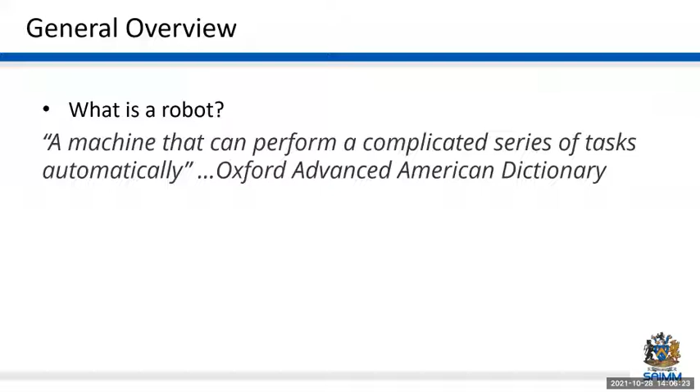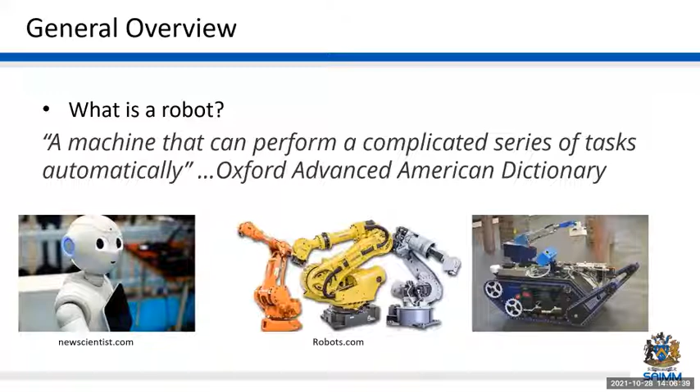So firstly, what is a robot, and what do we initially consider to be a robot? The formal definition is a robot is a machine that can perform a complicated series of tasks automatically. But when we think about a robot, what comes to mind? Initially, when I studied robotics, we were taught about industrial robots and we classified them in terms of their configuration. But nowadays there are so many different types of robots.

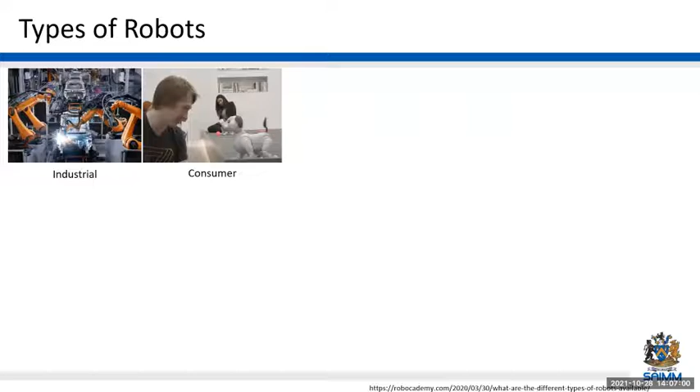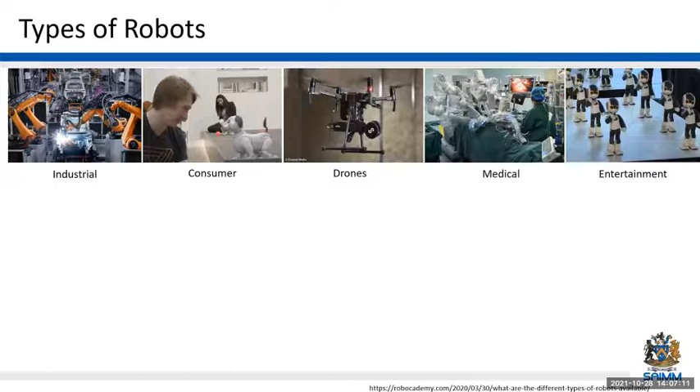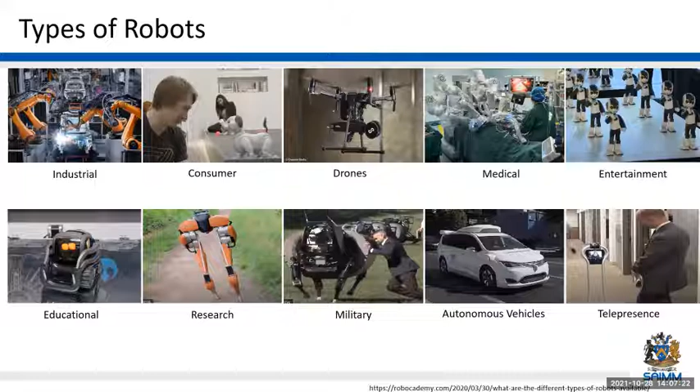The trend now is to classify types of robots in terms of their applications. So we'll start off with industrial robots, which include collaborative robots, automated guided vehicles, etc. There are consumer robots, and here you see an Aibo companion robot, drones, UAVs, medical robots, entertainment robots, robots for educational purposes, research robots, military robots, autonomous vehicles, and telepresence robots. In addition, there are classifications of humanoid robots and underwater robots.

What I found is that generally this type of classification depends on the different standards governing the design and operation of these platforms. In addition, there's also robotic process automation, a form of business process automation that allows anyone to define a set of instructions for a robot or bot to perform. For example, the chatbot you'd find on your Discovery app would be considered an RPA.

So when we consider mining robots, is it simply any robot used in mining applications? The answer would be yes. However, we need to also consider that there are different areas of mining applications. For example, drones can be used in mining, research robots can be used in mining, and industrial robots can be used in mining as well. But does that classify them as a mining robot?

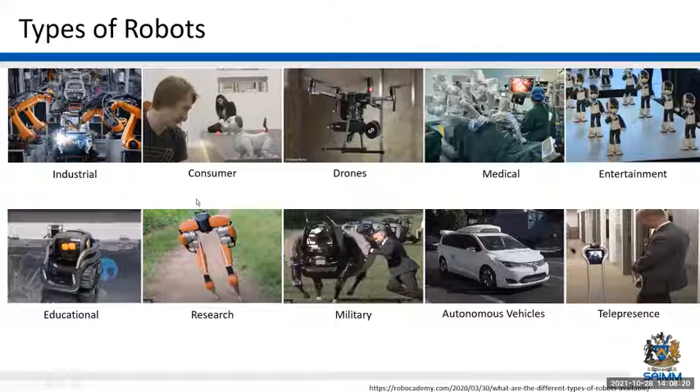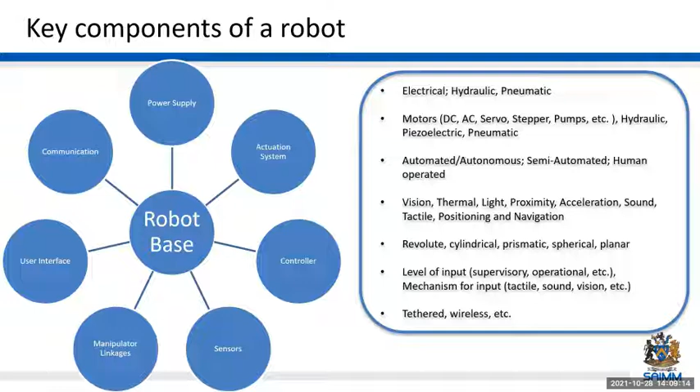For those different types of components, we get different options. For example, in the power supply, we can look at electrical, hydraulic, pneumatic, etc. There are different configurations of this which can be assembled to meet a specific need. And that's where I'm heading in the next slide: a robot is not just a platform that is designed in a silo. It's designed to work in an environment which has a specific need.

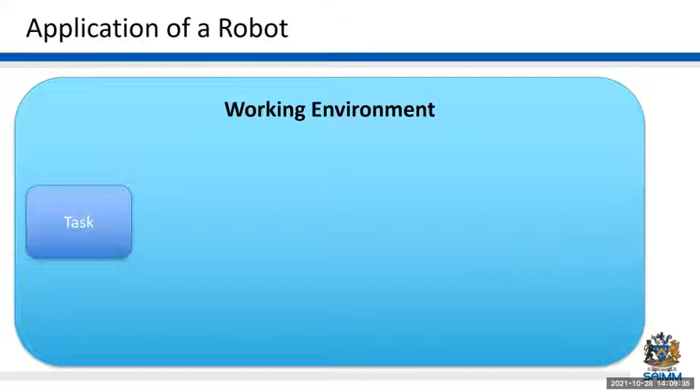To describe that, we'll start off with a working environment with a specific task that needs to be automated or robotized in some way. We can then follow a formal design process to come up with a solution to perform that task in an automated fashion, and then implement that robot. Ideally, what we're doing is conducting an ideation, creation, utilization process.

One thing to consider is that the environment it works in will place certain constraints on that platform. For example, the mode of operation: how would the robot interact with the environment? Would it be human operated, semi-autonomous, or have an autonomous function completely? When looking at different mining environments and their requirements, these sort of constraints need to be considered in the design of the platform, especially in remote circumstances where connectivity may be an issue, or tethered connections are not that practical.

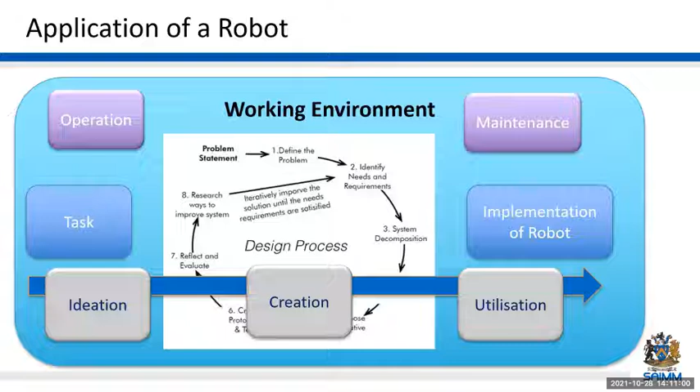There's also the maintenance consideration of that implementation we execute. An example would be in 2008 to 2011, there was a very big push in terms of mechanization at one of the platinum mines, and maintenance strategies not being suitably implemented was one of the causes for failures in that whole process.

Touching again in general on robot designs, what we find is that the trends in robot designs are moving now towards more modular designs, more configurable and reconfigurable designs, integrable or easy to interface, which talks to the last point here: fostering more collaboration across platforms.

For me, the most important one is where we can look at cross-application of robots across industries. The reason for this is that different industries evolve at different paces. For example, the automotive industry adopts digital technologies much more rapidly than the agricultural sector, or the mining sector for that matter.

So can we then look at cross-application of technologies developed in the automotive sector being applied to these industries? That's where I feel we can have a lot of value add in terms of quick wins.

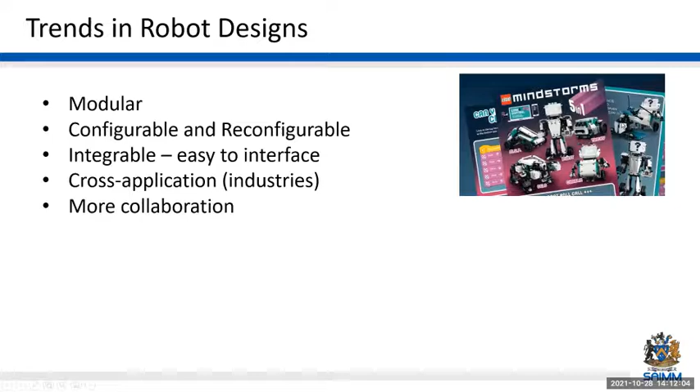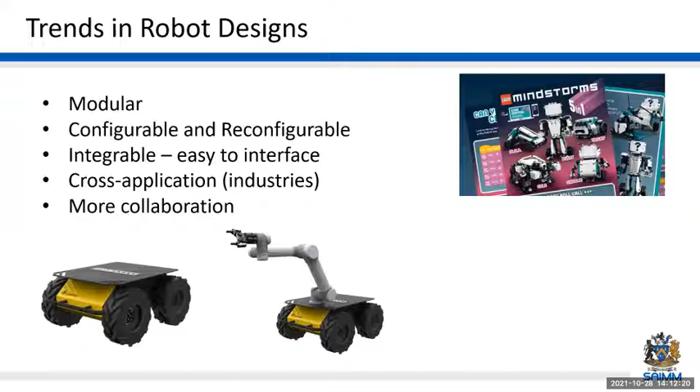An example of a configurable, modular design would be the Lego robots or Mindstorms. But a more commercial platform is the Husky platform from ClearPath Robotics, which comes as a standardized platform. You can put on it different types of, in this case I believe a Cobot or UR5, or configure it with different types of sensors to meet a specific need. What I wanted to show is that this modular, configurable, reconfigurable thinking has found its way into the commercial space of robotic design.

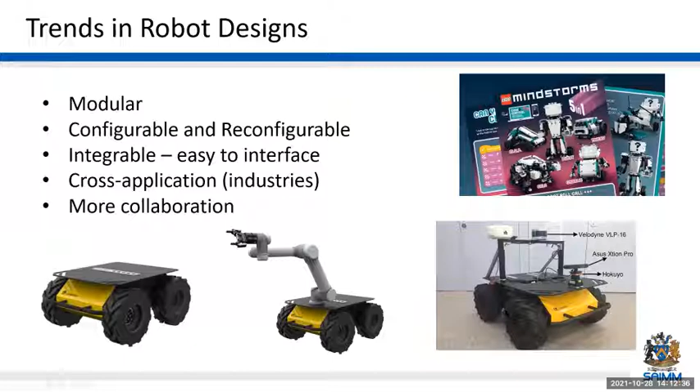In terms of mechanization and robotization, specifically with regards to mining, mechanization is defined as any machine, process, or activity that reduces the human effort required to break or move rock or material in a mine. Robotization is the introduction of robots to carry out a mining task.

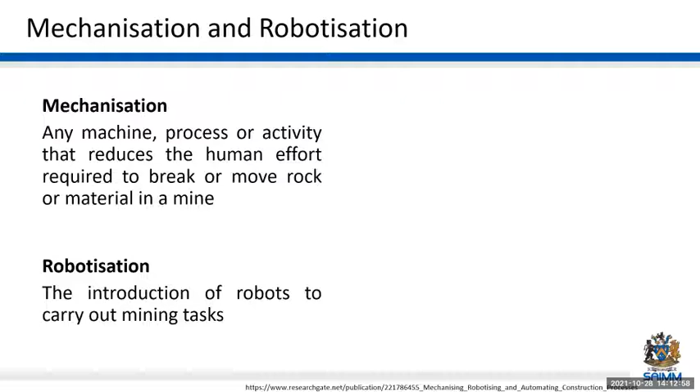I found this interesting diagram which shows a transition in terms of energy required from the user, and then the level of artificial intelligence or input control from the platform itself. Mechanization normally ends up somewhere around this point, and as we transition to the use of artificial intelligence, we get to more autonomous platforms, in general, in terms of the robot design itself.

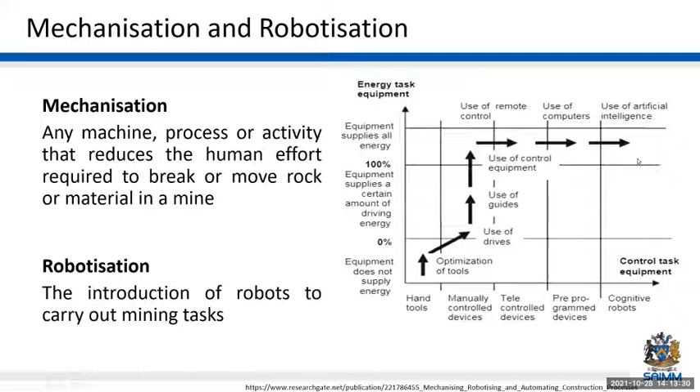In terms of application to mining, why would we even consider robots in mining? Well, typically mining environments are capital intensive. They involve a lot of routine job processes, and there are a lot of health and safety issues associated with job activities, such as exposure to potential physical harm with moving equipment, excessive heat, dust, poisonous smoke, harmful gases, etc.

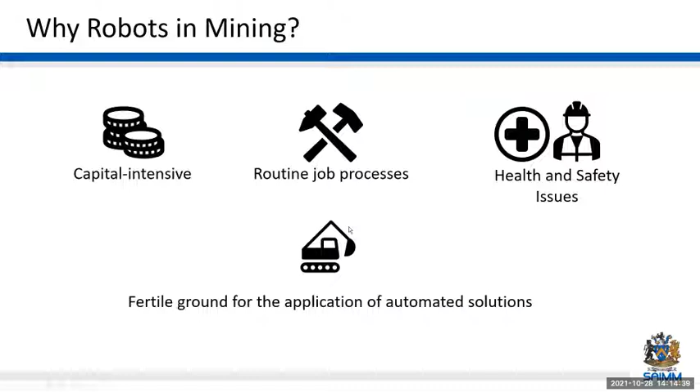This lends mining environments to being fertile ground for the application of automated solutions, where we can look at improving, first and foremost, safety and health, and also automating some routine processes. One example is the driving of a haul truck and implementation of monitoring systems to keep the driver aware of their state during the day, considering they have to drive the same path up and down over and over. So this is why we would consider it in general for the mining environment.

In terms of what's being done at Deloitte as a representation of the future of mining, they look at this across the value chain. In terms of automated solutions, they look at digitized geological data, which is not only the instrumentation or equipment to access geospatial information, but also the systems required to process that information.

So on one hand we're talking about the machine or equipment, which is that robot or some piece or device. Then we have the environment in which it functions, which needs to interface with that device in some way, and not only interface with it but actually make sense of the information coming through. I'll talk a bit more about haul trucks now.

Autonomous equipment, which includes the haul trucks, uses IoT sensors for real-time data capture. But again, it's a challenge as to where we implement those IoT sensors, and whether the data captured actually relates or transcends into some physical, tangible productivity gain for the plant. For me that's been a challenge in trying to track and optimize that process.

There are also wearables in terms of field maintenance and operator safety. This includes technologies like augmented reality and virtual reality for training, but also wearables for ensuring the right person is there at the right time, plus wearables for vitals and stats checking. There are drones for inspection, stock and safety monitoring, and connectivity of the workforce through mobile platforms to make sure the right person gets the right information at the right time so they can make the decision accordingly.

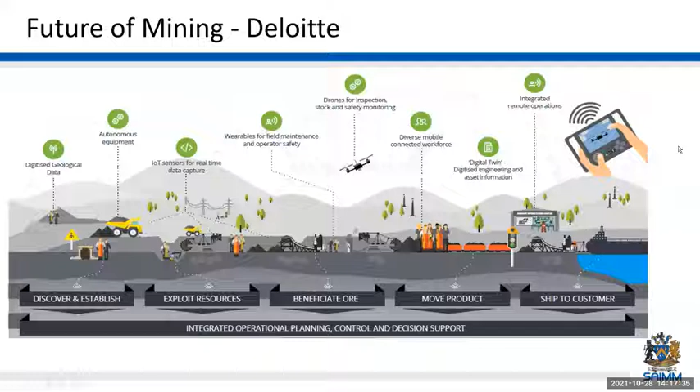All of that, though, hinges on the fact that there's a lot of data being generated. According to Deloitte, there needs to be some form of digital mine nerve center which looks at real-time information, historical data, housing this information in some form of platform, and then using that to translate into some physical, tangible output that can benefit the operation of the entire process itself.

So there's these robots that are going to come into an environment, or automated solutions that are going to come into an environment, but there's also the overlying or overarching system that needs to manage these platforms, not only from an operational perspective, but also from a strategic perspective, to understand what is the best solution for this specific point requirement in the value chain.

Just a quick snapshot in terms of the global robotics market in mining. This was a publication by Technavio, which released a report for 2018 to 2022, and they're quite positive, claiming that the market for robots in mining will be accelerating over this period with a compound annual growth rate of over 27%.

One of the key drivers for this market will be the increase in technology investment by mining companies, in efforts to improve productivity and, more importantly, improve safety around mining environments. One thing worthy of note is that the market is fairly fragmented, with quite a few players occupying the market share, and this lends to more sporadic point solutions that go to the cheapest vendor normally, as opposed to looking at things from a holistic perspective.

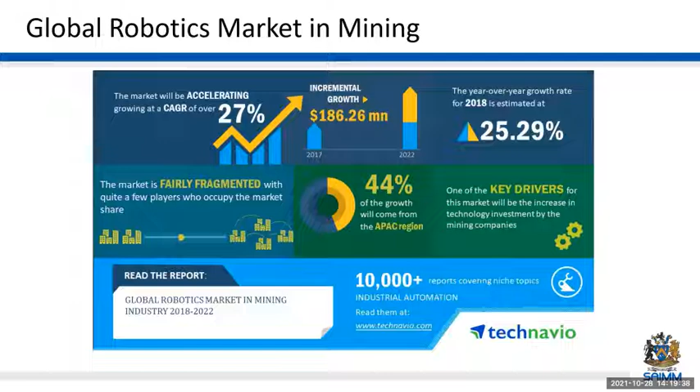In terms of the mining sector, this was some stats released by the Minerals Council for 2020: the mining sector employed about 450,000 people, contributed about 27 billion rand in taxes, and about 361 billion rand towards the GDP. This is quite important when considering now, as we introduce more robotic and automated solutions to this environment, what impact it has in terms of the employment of people, the number of people employed, the taxes coming into the system, and the overall contribution to the GDP.

Moving on, we'll start with some commercial platforms. It'll be good to remember the components of the robot and view these platforms in that context. So I'm going to start now with materials handling and autonomous haulage in particular.

I'll start with the Cat MineStar command system, which has been documented to reduce operational costs of mines by a claimed 20% and improve productivity by up to 30%. This is obviously because it can run continually, it's reliable, it has sensors, etc., but it also has the ability to alert maintenance workers on machine problems.

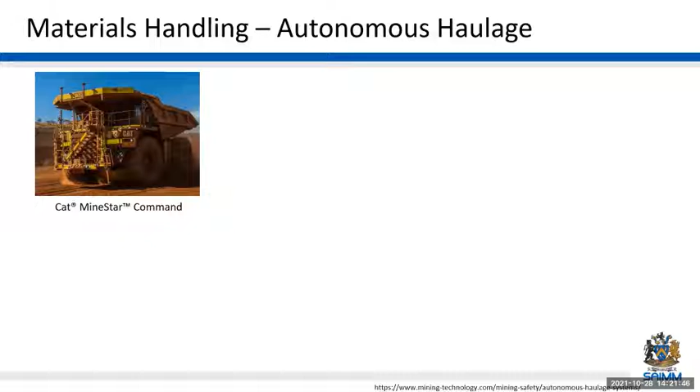This is because of the sensory components on this platform, implemented in a way to understand firstly what are the key areas or key inputs to measure in relation to the KPIs you want to govern, and then also to facilitate the generation, transmission, and processing of that data to translate it into improved maintenance. There's about 350 trucks like this worldwide, and they're currently embarking on a move to electric drive vehicles.

Komatsu also has their offerings, the electric drive haul trucks, combined now with their procurement of Modular Mining. They've obtained the Dispatch fleet management system, which allows for interaction between the loaders, graders, and dozers. Instead of these different components functioning as individual entities, they can talk to each other, forming a systematic approach that facilitates an optimized integration of these different components into one offering in terms of automated haulage.

There's about 150 of these trucks used globally, and the system was the first in the industry to qualify to run on private LTE mobile broadband technology in commercial operations. This was in 2019.

Hitachi also came up with their automated haul solutions. One interesting thing was that the company incorporated a permission control technique from the railway industry into its automated haul systems. For me, this was quite interesting because it shows in the commercial space how technology transfer can occur across different industries, in this case from locomotive to the mining industry.

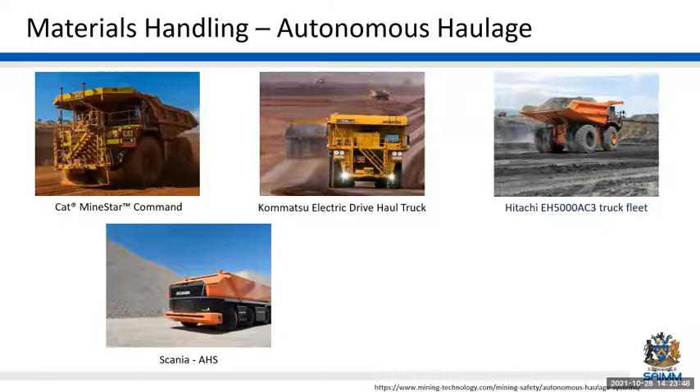Lastly, Scania also came up with a solution that runs on an electric battery drive system. One interesting thing in terms of moving to electrification of these vehicles is it lends them more suitable to underground applications in terms of heat generation, etc.

But there are ongoing challenges with these systems, and some of them recently have been noted as cybersecurity threats in the form of GPS attacks, which force these platforms to deviate from their true positions, leading to potential collisions. There are also camera attacks, which intentionally block out some of the cameras, potentially causing collisions. There's also reliability of connectivity in some areas that poses an issue when looking at implementation of these systems.

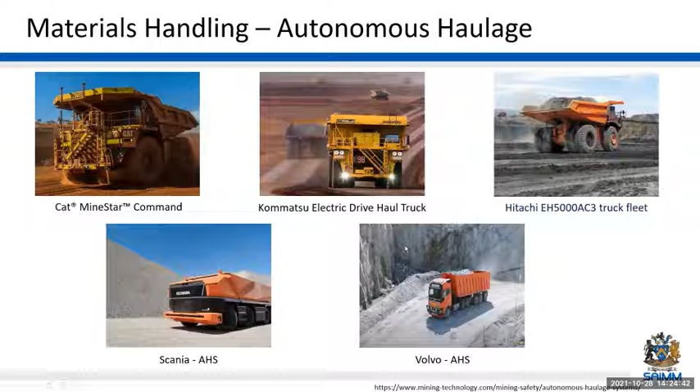In terms of our layout, or the representation of what a robot is, it's improvements in the power supplies, the communication, the user interface, the controllers, and the sensors that are driving the development in this field.

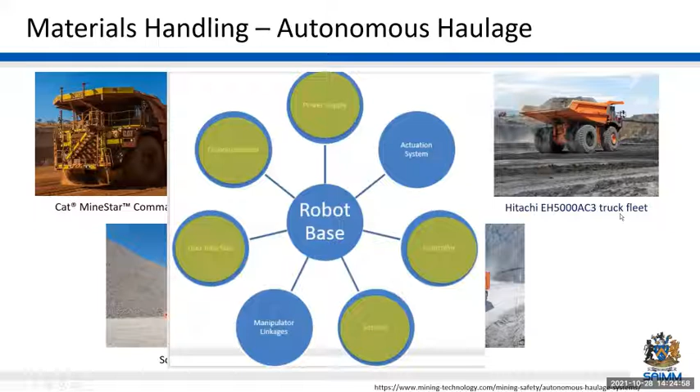Then if we look at autonomous drills, there's Vale in Brazil, Rio Tinto, and then our own Kumba Iron Ore, which embarked on implementing autonomous drills in their environments.

Vale, I believe, if they haven't finished it already, is currently embarking on completing the implementation of 21 of these units, using the Flanders ARDVARC automation technology, coupled with or implemented onto Epiroc and Caterpillar platforms.

One thing I want to point out here is that these platforms weren't necessarily built for autonomous application. They were retrofitted for that type of application. Why that is significant is it shows that legacy equipment can be taken advantage of, or we can utilize legacy equipment with certain innovations in control technologies, etc., to facilitate this type of application.

What that means then is that the CapEx, etc., gets impacted by this type of approach, and it relies heavily on the ability or the willingness for vendors to facilitate this type of collaborative approach, which I spoke about in terms of the trends in robotics.

In terms of the Kumba Iron platforms, it's developed by a supplier called Rosond, I believe based in Midrand, and they are aiming to implement 28 of these rigs. Some reports say up to 30 at the site, but the goal is to do that by the end of this year. These platforms are prone to similar challenges as the autonomous haul systems in terms of GPS hacks and cybersecurity issues, etc.

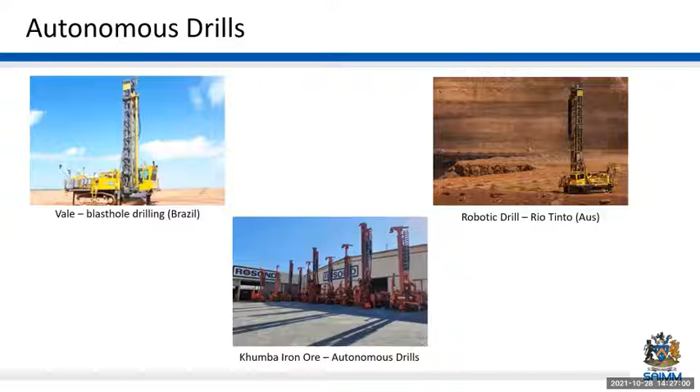Again, the systems or components driving progression in this field for me are the communication and the user interfaces. The reason I mention user interfaces is that when we have predominantly a low-skilled labor force, the equipment we expose them to and the interface to that equipment needs to match that level of skill. So nobody needs to necessarily be a programmer, but they may be able to use some form of graphical interface to facilitate that interaction.

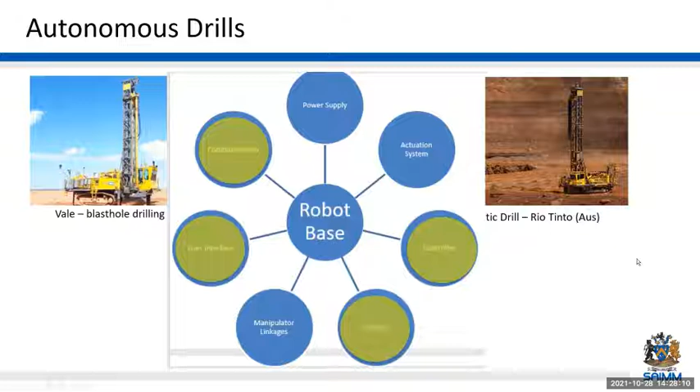Then there's advances in the controllers in terms of the execution and the accuracy or precision of the motions, etc., and then the sensors for providing feedback in terms of GPS coordinates. I remember at one point they were talking about GPS accuracies within 240 millimeters, and the drill bit itself was about 250 millimeters, so they were well within, quite accurate, for drilling these holes, etc.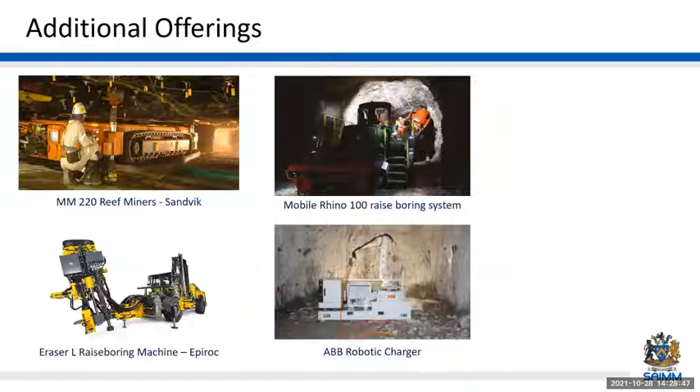There's also inclusion of self-driving ore carriers. And in addition to the platforms themselves, there are tools on the platform, such as smart cutters, which in some cases can associate changes in current draw to the hardness and potentially the characteristics of the materials being removed, and can provide information on that.

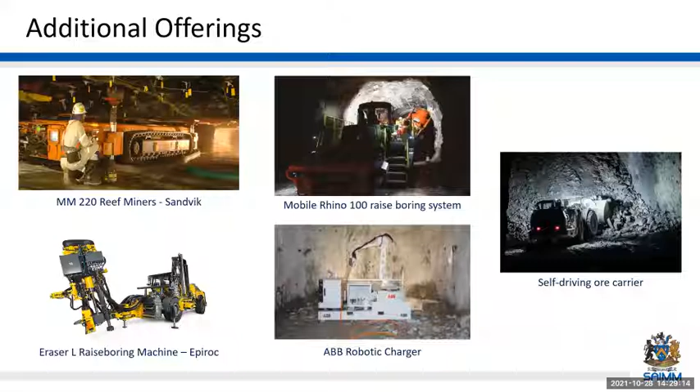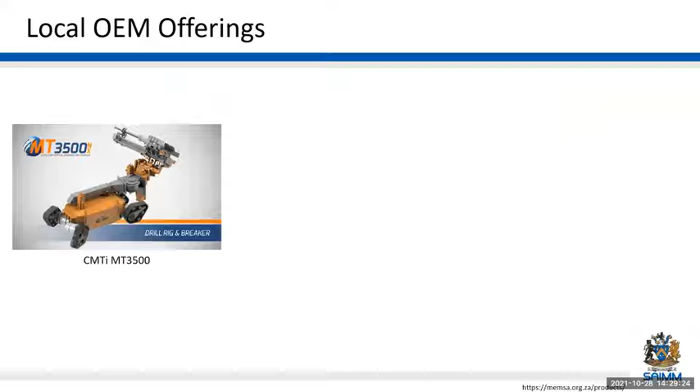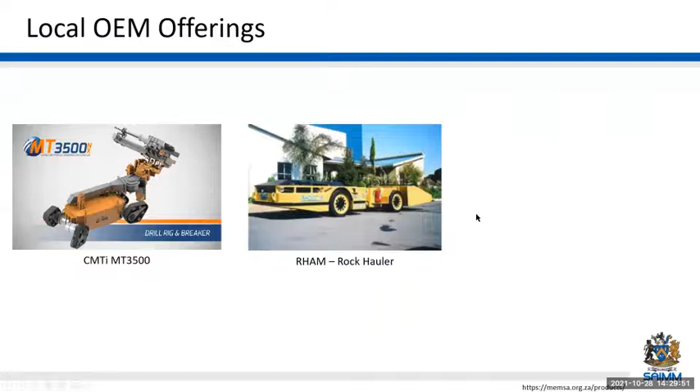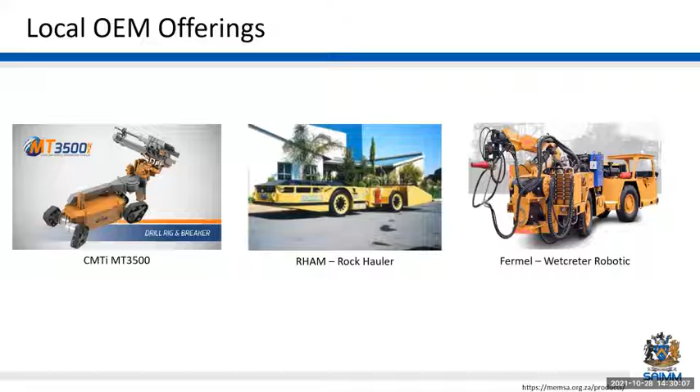In terms of some local OEM offerings, we have the CMTI MT3500 platform, which is remotely operated. One issue previously was staff leaving the remote controls in an almost waterlogged environment, which resulted in damage. We also have the RHAM rock hauler, and the Wetcreter robotic solution from Fermel, which has some robotic abilities in terms of spraying the Wetcrete, etc. Kindly note I haven't been able to survey all the offerings of local OEMs, and I may have excluded some that may be relevant, so I apologize for that.

In Germany, we see a lot of initiatives happening in the research space, but it's transitioning more to the commercial side now. One example is the Julius Robot, positioned to be an assistive robot.

This involves a robotic arm tipped with a 3-fingered hand. It's capable of holding a scanning device very still and is able to analyze the quality of ore samples. The idea is to have a symbiotic human-robot team where the robotic assistant contributes its physical strength and precision, while the human is in charge of decision-making ultimately.

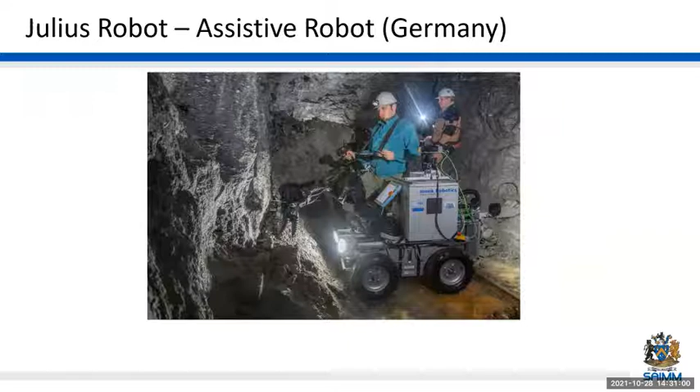Again, the key components in terms of developments that drove this are the user interface, sensors, controllers, actuation systems, power supplies, communication, etc.

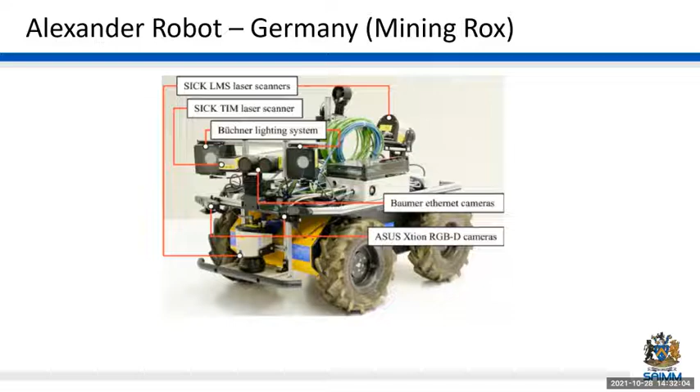The first section was a working section with rails, the second was the ore drift. The robot was able to generate a navigation map. It measured temperature, air humidity, and air speed, and tied these measurements to the generated map that was produced. Here we see how the robot base merged with the inclusion of some sensors can provide a quick win in this type of application.

Another example is the UNEXMIN, an EU-driven initiative developed to reassess old mines, most of which are flooded. This is an autonomous underwater robot which can function without remote control. The goal is to get it to function up to 500 meters without remote control or any human intervention.

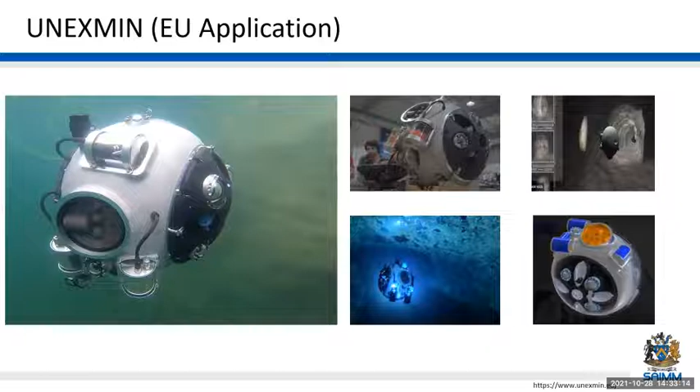It can potentially identify interesting minerals, and the purpose is to assist geologists in determining if further exploration is feasible. It consists of a flow meter, sonar, laser beam, and accelerometer sensors. The project is still ongoing in terms of completing tests for the proof of concept, and because it's a new platform, innovations needed to happen across all these different components.

This is a rail inspection robot called SID, or Survey Inspection Device, developed at the CSIR for inspection of rails. I believe in 2018 there was a case in Phalaborwa where a locomotive collided with an elephant in the game park, and a device like this that runs autonomously ahead of the locomotive could have helped prevent that type of situation.

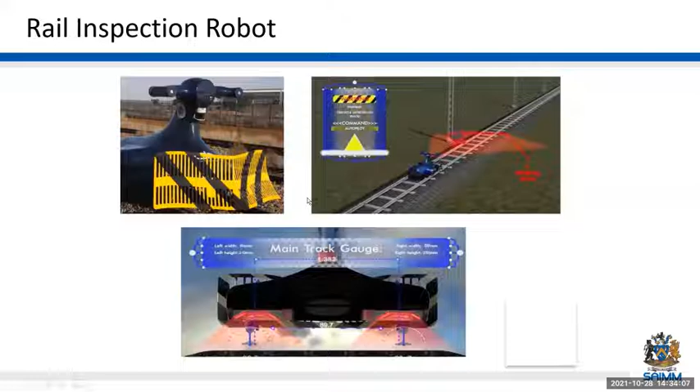It also helps in preventing derailments. This was taken to a proof of concept stage where it could measure track gauges, etc., and it was tested on some rails for Transnet. But application to the mining industry is potentially there.

Lastly, in terms of drones, they have many applications both on surface and underground. I'll talk a bit about the surface ones, where we look at stockpile management for better inventory and financial data, better forecasting of mineral stock for sale, and mine or quarry monitoring and operation planning for haul roads and water and sediment flow.

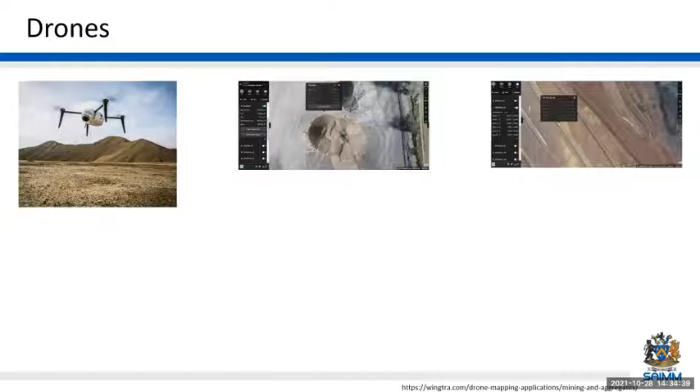There are assessments before and after drilling or blasting, hazard identification and mitigation, and lastly mineral exploration. Again, here it's the changes in these different mechanisms or components that enable this type of development to be commercially available and implemented in the mining space.

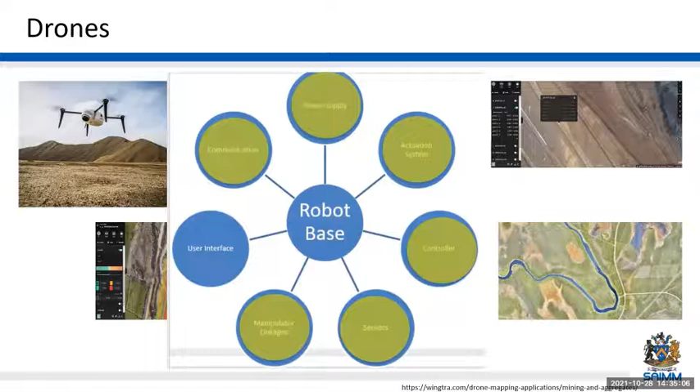In terms of some emerging developments, this is some results from an analysis done by Boston Consulting Group, who have a branch in South Africa.

They looked at what's already in use in terms of big data, real-time data, logistics, and blockchain, and they looked at digital twins, which are already being implemented at different mines or different operations. They looked at real-time data being implemented for predictive maintenance, the logistics side of things, the solutions existing there, and then the application of blockchain to validate the transactions that occur within the value chain, across the value chain.

Then they also looked at some of the close to commercial use in terms of interconnected sensors, and that's looking at the drone side of things, but looking at performing in situ scanning.

There's advanced analytics, and some of the challenges come in where, for example, you get autonomous trucks that generate 1 terabyte of data per day. And it's nice to have a system that can generate this data, but sometimes it becomes so much and we don't know what to do with it. And there are so many systems that generate this type of data.

In one of the mines we visited, there were 293 independent systems feeding information. And it became very difficult to track the application or facilitate the incorporation or transition of that raw data into some physical, tangible improvement in the system.

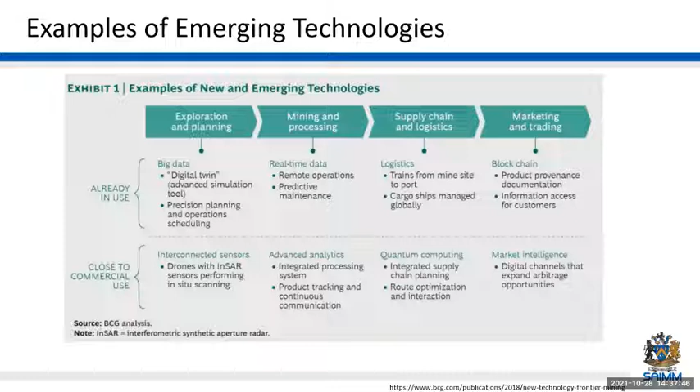An example would be for the haul trucks, and a good application would be for looking at dispensing suppressant for dust suppression and optimizing that process. If you can equip those trucks with flow meters and optimally dispense the suppressant, you could also have an idea of what the cost is going to be at the end of the month. Typically what happens is that the suppressant gets dispensed, and then the contractors bill the company at the end of the month saying this is what you owe us, without any sort of feedback or method to validate that spend. Then we also look at market intelligence in terms of digital channels that expand arbitrage opportunities.

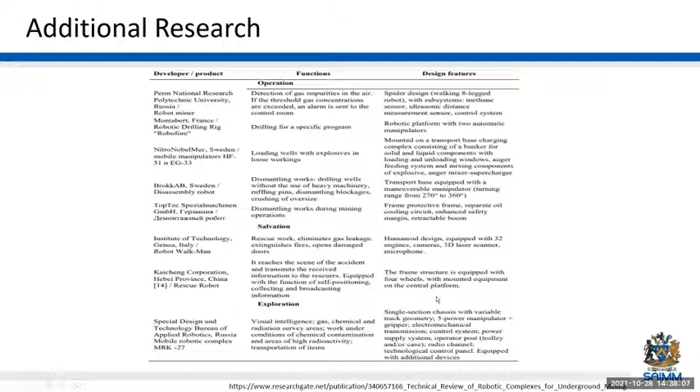But there's also research being done across the globe when it comes to different types of robots and applications of robots. I'm not going to go too much into this because of time constraints, but I believe this presentation will be made available and you guys can read through this. This was just to show that there is ongoing research.

Moving on then to further work by Boston Consulting Group, we have the challenges that they've been looking at identifying, where companies say that they want greater collaboration between IT and users. The data is insufficient or inaccurate. The solutions that come in are standalone or work in silos. And there's a lack of a well-established digital upskilling program, so when we incorporate these solutions, there's an insufficient skills base to address that.

Sorry, I'm just going to... Sorry guys, I must apologize for the background noise. Of all days, people decide to move offices today. Apologies for that. Sorry, where was I? I was talking about the insufficient approach. Again, sorry about that, I have to tell people to keep quiet there.

Okay, so I was talking about the lack of a well-established digital upskilling program, where we want to incorporate or bring in these automated solutions, bring in these robots, but we don't necessarily have the skill sets to adapt to that or to operate and implement those solutions. And that poses a challenge as well.

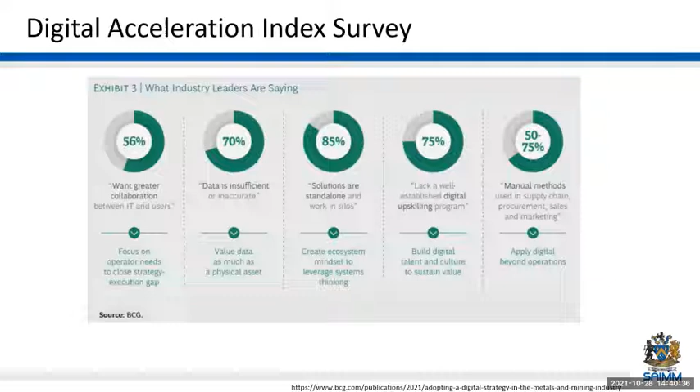So some of the transitions they've proposed here are that we need to focus on the operator, focus on the operator needs to close the strategy execution gap. And then the second one here, where they say value data as much as a physical asset, I do agree with that, but it's about understanding firstly what that data is. And if you cannot relate it to some physical improvement in the system or some operational improvement, then it's not really valid data. So in terms of valuing the data, it's actually identifying which data to value first and then valuing the data, in my opinion.

What I looked at in terms of what needs to happen is some improvements in the systems or controls that we have, the communication side of things, and the user interfaces. I'll talk about that quickly.

I've got a nephew who's 2 years old, and he can unlock my smartphone, go to YouTube, and watch his videos all the time. He doesn't need to know how the smartphone works, but he knows how to use it. Similarly, when we introduce new types of robots or automation systems into the environment, the interface is very important, because the level of worker we'll be addressing is typically low skill. They don't need to know the inner workings of the platform, they just need to know how to use it, and that interface becomes very promising.

I'm going to move to the next slide, and I'm hoping you guys can hear the sound clip. John, if you can confirm whether or not you hear the sound clip when I start playing the video, I would appreciate that. This is a solution that has been provided by Boston Dynamics.

It started off as a military vehicle or robot to assist with carrying certain payloads for the military force.

Hi, John. Sorry, I can't see anything, I can't hear anything. Okay, no, I didn't play it yet. All right, no worries. Okay.

Yes, the platform was developed for military applications, and the core contribution of the company came in the control systems for stabilizing the platform, allowing it to go over quite rough terrain. This platform is now available for about $75,000. There is a licensing fee associated with that, but I think it could be a quick win when it comes to serving applications for the mining industry. You're going to see why as I play this video.

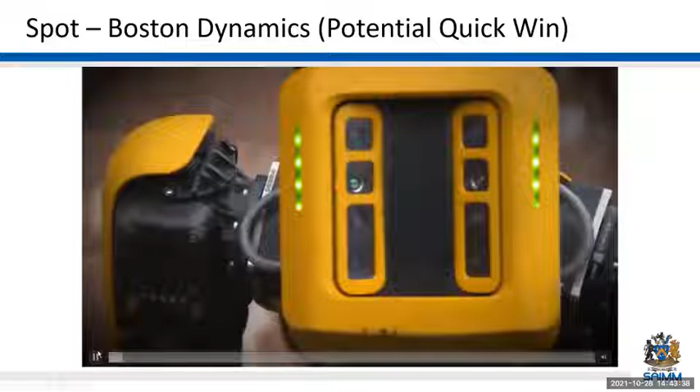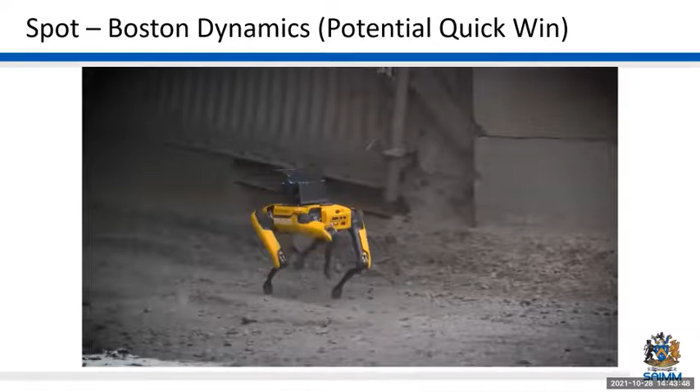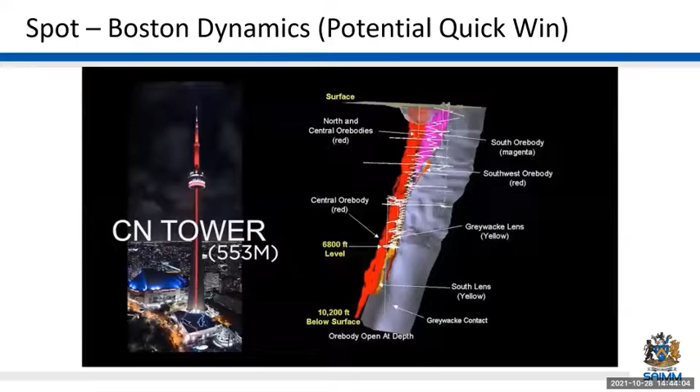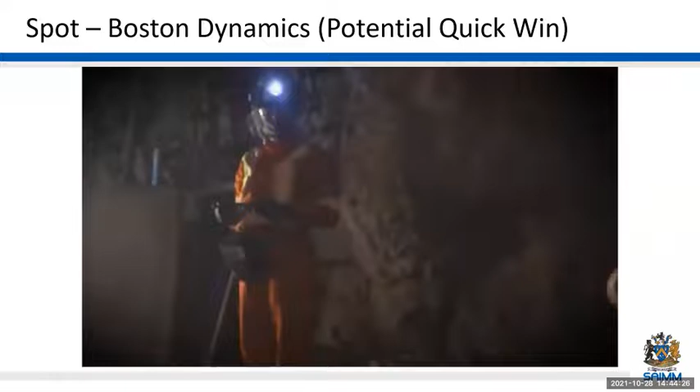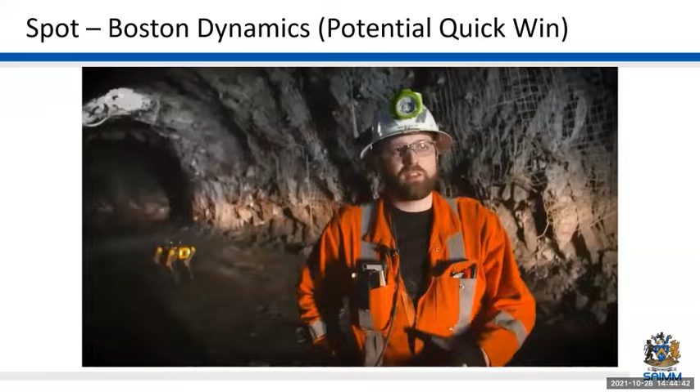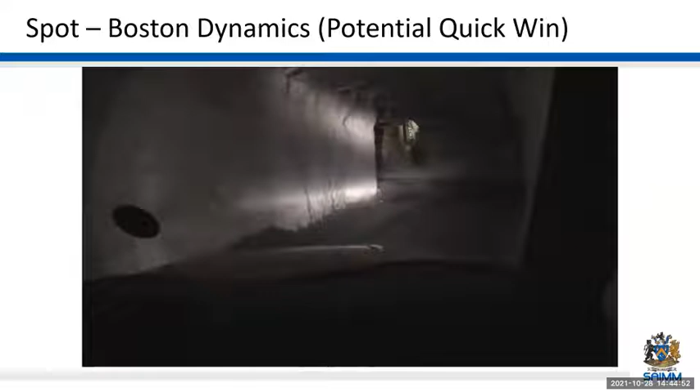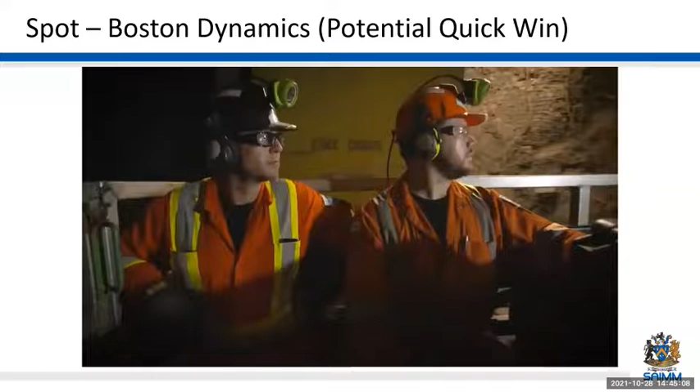Tools like this can get us right up close and personal with the things we need to see. Currently, when we're trying to get information in these locations, we use small tracked robots that we can carry around easily as part of our normal work. We need to ask a lot of our operators to come through and clean the areas, the floors, so that we can get in. But what I've seen with Spot is that it's been able to pass anything that's normally left without any real special care to make it accessible. I actually found out about Spot through some people I work with down in Sudbury, a group that specializes in technology underground, things like drones and road exploration.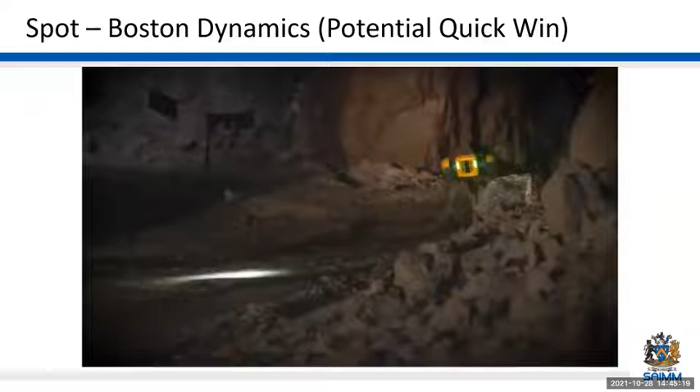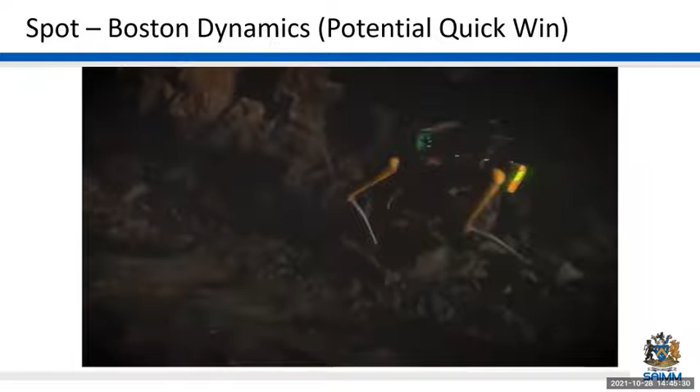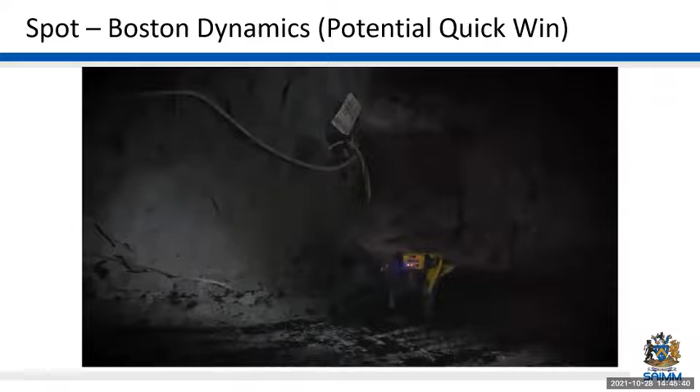That's what led us to this point where we are testing Spot underground. I was quite impressed to see how it can handle different types of terrain. We have a fleet of tracked and traditional wheeled robots we use underground, but there's nothing that compares to the way Spot steps or moves around objects and moves ground and other materials. I see a really big advantage when it comes to Spot, and that's the distance and duration we can take on with it. That means we can put our people very far away from a hazard, and we can get in and get the information we need.

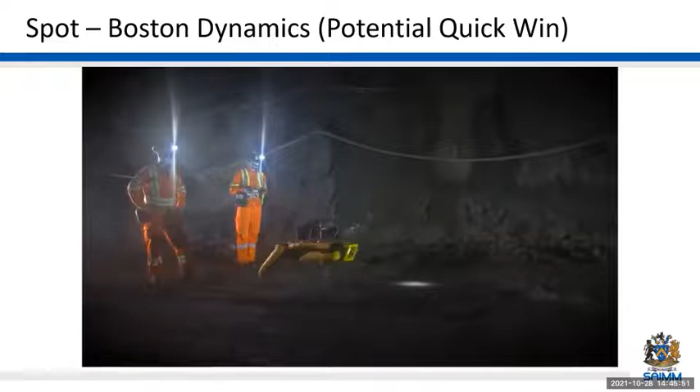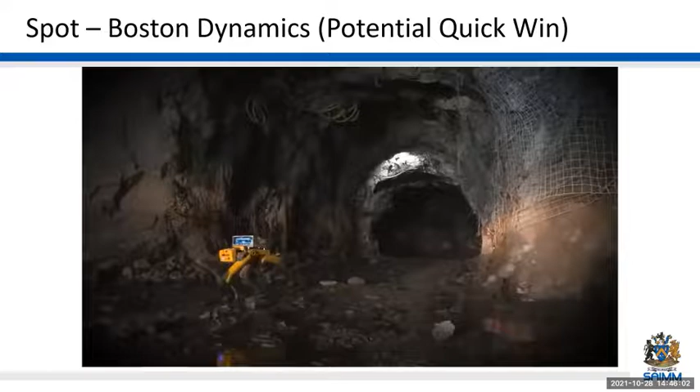When it comes to engineering-driven mining like we do, it's really based on data. It's driven by our ability to get information on a regular basis and turn it around so that we can make good decisions based on that information. So having a tool that can quickly, reliably get into everywhere that we need to get information and bring it back to us is invaluable to our business.

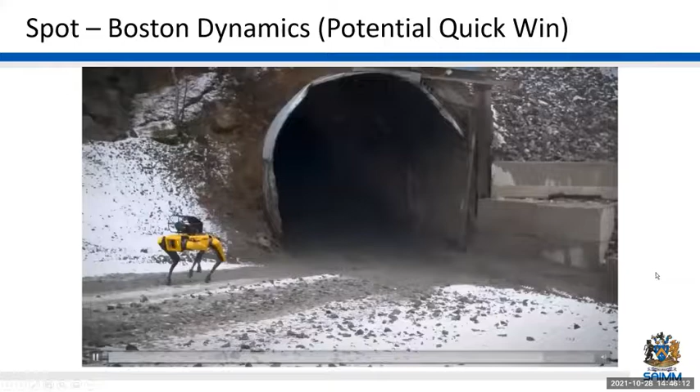Okay, so you guys get the point of that video. And hopefully you see the value add in that in terms of search and rescue operations or also surveying operations. I think that could be a quick win, and it's a commercially available platform. It already has all the sensors on it, and you can order it in a very customized fashion. I believe the University of Johannesburg has just procured one. So anybody in the mining field that wants to explore this opportunity can get hold of the guys from UJ to facilitate something like that.

I am aware of time, so I'm going to be rushing through this next few slides.

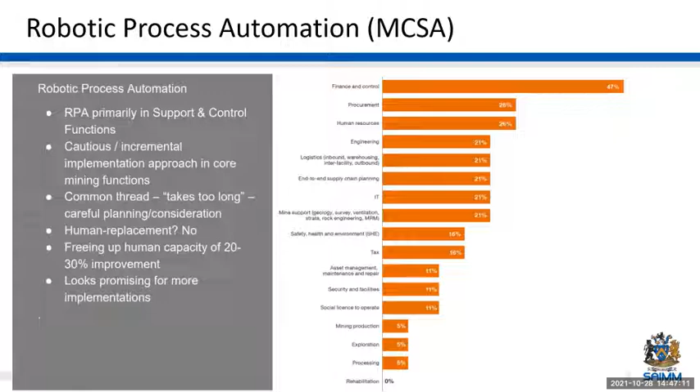In terms of robotic process automation, what we see is that typically automation finds its way into the finance and control systems, or when it comes into production, there's a bit of caution and incremental implementation when it comes to the core mining functions and implementing it in there. What we find though is that when we do introduce these disruptive changes or robotic processes or automation at any level, there's going to be a shift in the skill sets required from the workforce, and we'll need a higher level of skilled employees.

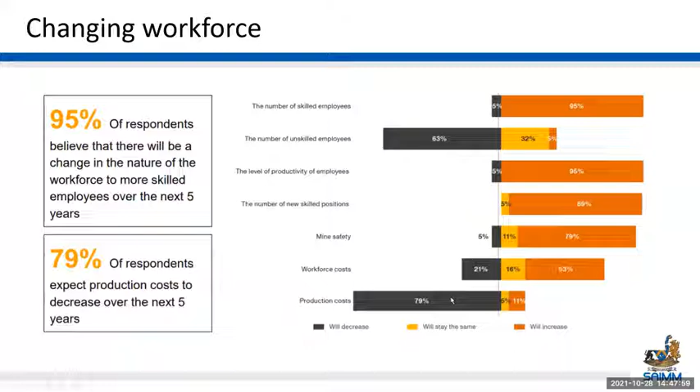The number of unskilled employees will reduce. The level of productivity per employee will be expected to improve. There'll be a number of new skilled positions increasing. Safety is expected to improve. The workforce costs are expected to increase because you're going to be paying higher salaries, but bear in mind that obviously you're going to be paying less people. And the overall production costs are expected to reduce. That's when we look at this type of an intervention.

But in addition to that, in terms of the workforce impact, you've got to look as well at the systems that need to be in place to facilitate this type of adoption. And here we have to look at things like data lakes and data islands, etc. And there's certain challenges associated with that, that need to be considered.

Looking at the impact on mining, the first question that's going to be most asked is, will the introduction of robots cause job loss? And the answer is yes, inevitably it will at some point. The argument is always that automation or robots will cause more job creation in another field, etc. But if we look at Uber, it employs much more people than large-scale manufacturers and mining operations—I'm talking about individual companies. The number of people taking metered taxis because of the introduction of the Uber platform has reduced though. So there were jobs displaced in that field or that industry. So yes, there is going to be that type of job loss, even though there may be creation of more jobs, but ultimately there's going to be this type of job loss.

And the example I'll give is that we can say we can expect people to move on with the digital revolution and become data analysts, etc. But if you have a 50-year-old rock drill operator who's done the same task for more than 30 years, it's very unlikely that they'll be able to transition to that position of using AI or becoming a data analyst. So there we need to look at other options, and I'll explain the possibilities just now.

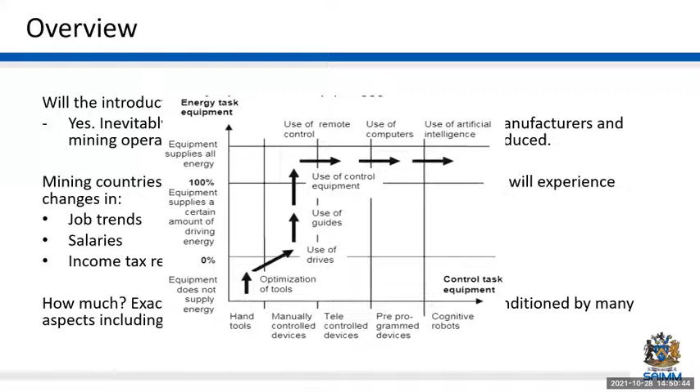So what can be done about this? Well, we can look at reskilling, upskilling, and cross-skilling.

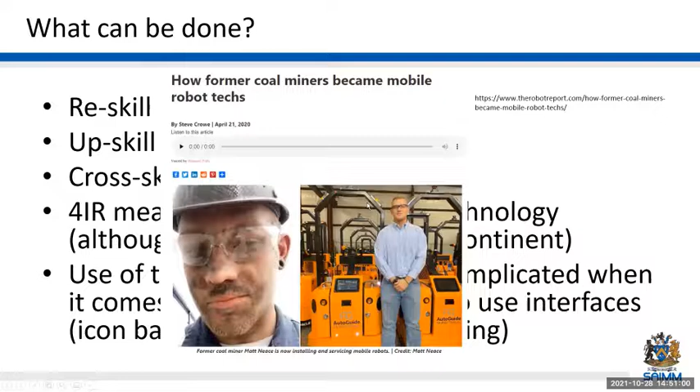There's an example here of a coal miner becoming a mobile robot technician. But I go back to that case of the 50-year-old rock drill operator. What can we do with them? If there is going to be such a type of displacement ongoing, then we need to look at other options such as reskilling, upskilling, or cross-skilling them specifically to be absorbed in a different sector, perhaps. For example, they could work in the agricultural sector or the manufacturing sector. Those are potential solutions for that type of displacement.

It's not really a very convincing solution, I would say, but it is a possibility that we will need to explore. And this definitely needs to be looked at on a case-by-case basis. There's no generic answer for that, unfortunately.

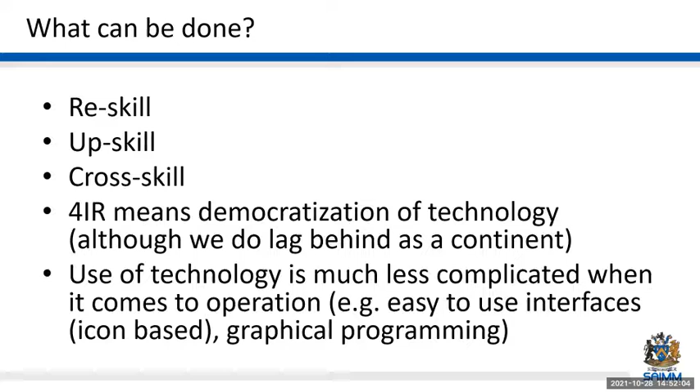The last point I've got here is that we can look at easing or making the operation of technology much easier. I gave the example of my 2-year-old nephew who can use his phone, or my phone. That's because the interface to that is so easy to use. So we can look at that as a technology change.

So in conclusion, for me, there's no silver bullet in terms of there's no one robot that's going to really change the face of mining per se. I've shown you one that has potential to improve the situation in some cases, but that needs to be tested.

We need to look at incremental gains, therefore, and this has been ongoing for quite a while. We need to break down the silo mentality and look at cross-application of technologies, learn from other industries where possible. I spoke about bringing in what's being done in the automotive sector and applying it possibly to mining where applicable. We need to take advantage of developing technologies such as 3D printing.

One of the problems is that when you've got legacy equipment and you don't have suppliers anymore, and spares are in short supply or non-existent, we need to start looking at creating that value chain, and robots can contribute to that as well.

We look at changes in materials and development. There's improvements in battery technologies, operating systems for robots, etc. We haven't even touched on that, interfaces, etc.

Then we need to look at also skills development platforms to address the local skills gaps, and we need to focus on keeping humans in the loop when it comes to certain applications. Europeans focus mainly on using machines to replace human labor. We want to use machines to create human labor, and that's what we should be focusing on.

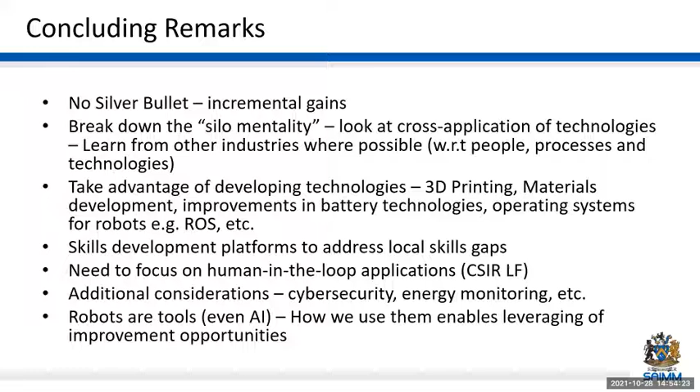Lastly, I'd like to ask this question, and just so I can also learn from the audience themselves. The 4IR is already here, the changes have already begun. Are we willing to wait out the challenges in terms of trying to look at international solutions coming into the space, or can we in some way become proactive with the focus towards the impact? And if so, how? How can we do that? What are the quick wins we can look at implementing? What are the challenges to implementing localized technologies? What are the challenges with localizing those technologies?

And there's a lot of fantastic work being done by our local OEMs, the universities, research organizations, the research institutes within the mining faculty itself. How can we leverage off of that? And how do we coordinate all of that? I know there are initiatives like the Mandela Mining Precinct, which looks at coordinating such types of activities. But how do we have this impact, and what are the barriers to this success?